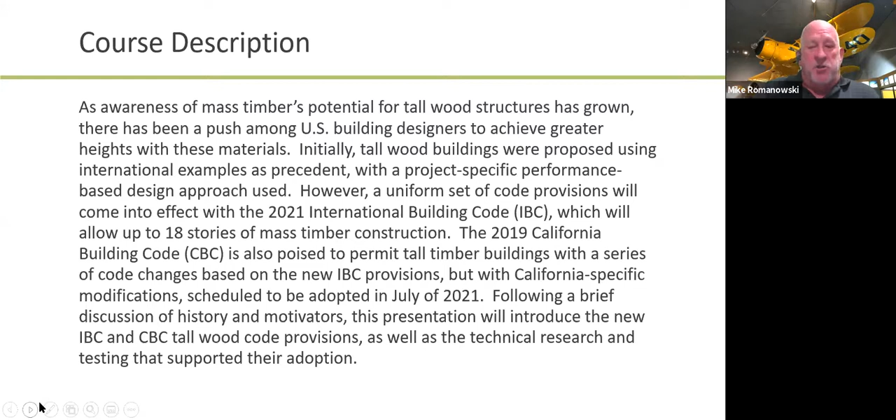Here are our learning objectives. We'll talk about some global history, what's going on in the world -- most of it has been overseas in terms of tall wood, with very few tall wood examples in North America. We'll explore the work and conclusions of this ad hoc committee, going over the new recommendations that will go into the 2021 IBC. We'll talk about the new different types of mass timber construction, existing construction types as well, and finish by identifying the differences between the IBC and CBC versions as far as tall wood goes.

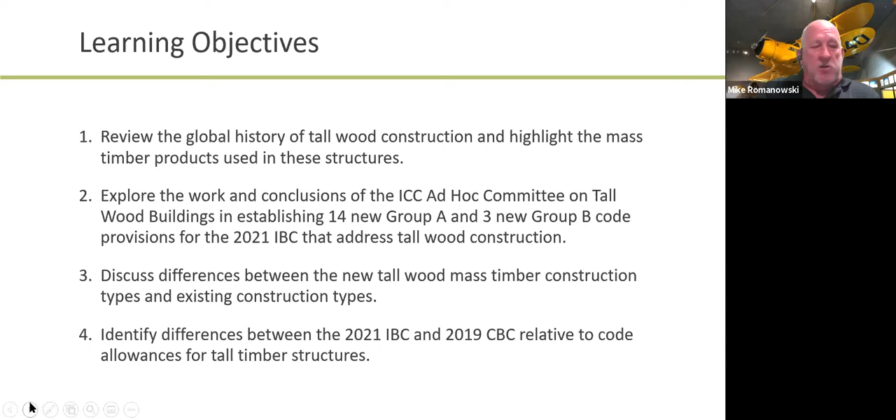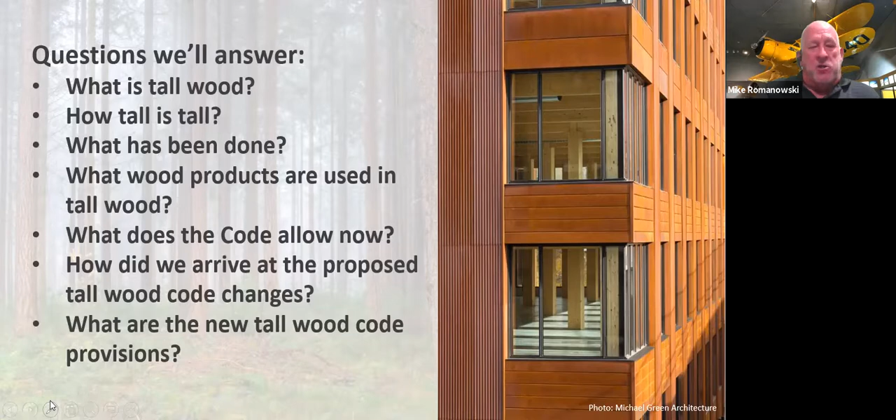So some of the questions we'll answer: what is tall wood? How tall is tall? What's been done so far? What products are used? What does the code allow right now? How did we arrive at these changes? And what are these new provisions?

Before we get too far, I want to go over some terminology. Everybody's pretty familiar with the term heavy timber. We've got a type of construction in the code right now, just called Type 4, also called heavy timber. You'll see that term used quite a bit, and it's been around for over 100 years.

It's based on the fact that large wood members char at a very predictable rate, and that char layer creates an insulating layer for the remaining core of sound wood. It was found early on that if you built a heavy timber building with large members, it didn't all go up in flames at once. It was very hard to get fire to start burning in heavy timber members. Even with a fuel load burning against it, it would char at a predictable rate and stay in place. With large enough members, you could exit the building safely, and firefighters could enter and fight the fire safely.

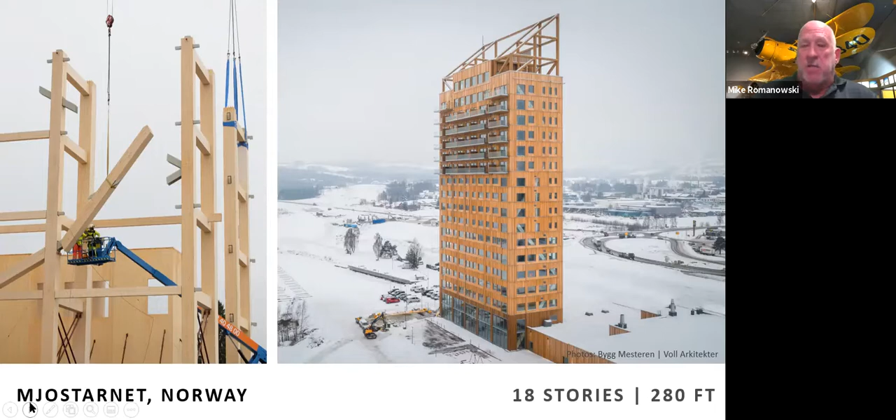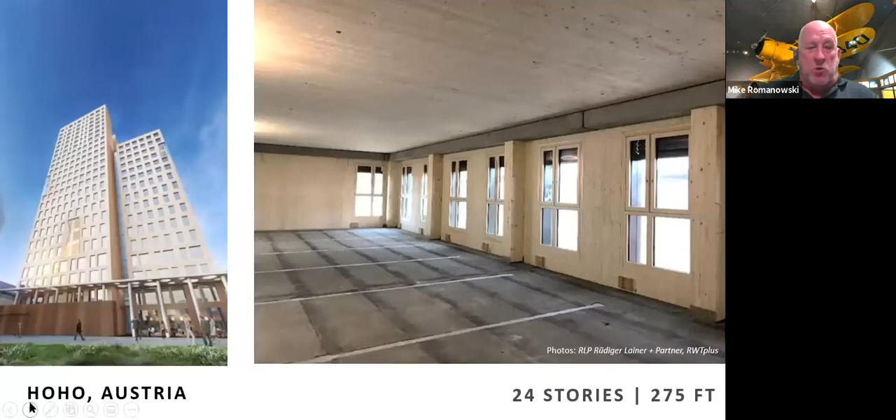There's another project called HoHo in Austria, which is 24 stories - that's 6 more than Mjøstårnet, but it's only 275 feet, so they had a closer floor to floor height. It's technically not the tallest in terms of feet, but the tallest in terms of number of stories. Again, both of these are not in the United States - these are Austria and Norway.

The closest one we have to us right now is the Brock Commons project, up in British Columbia at the University of British Columbia. Again, this is 18 stories, 174 feet - actually 17 stories of mass timber on a 1-story concrete podium. Maybe a few of you have even seen this. I got to visit the site the last day that they were flying the last wall panel into place. But what's interesting here is that speed of construction was the big driver on this.

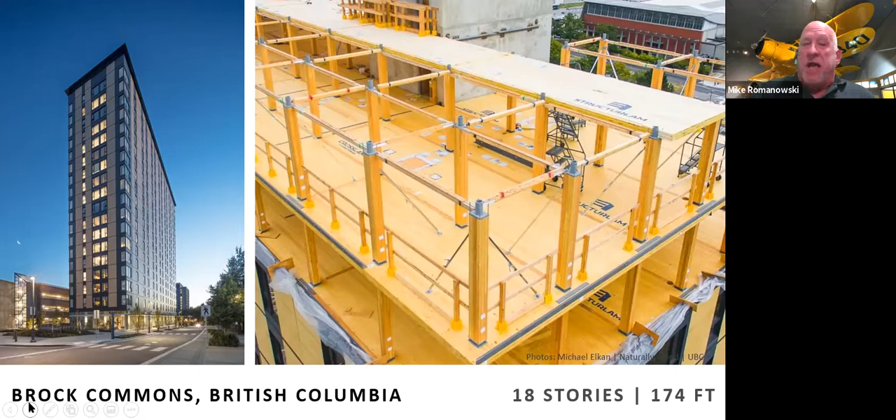It went up real fast, but the end product - there is not 1 inch of exposed CLT. Everything is totally encapsulated. And what you'll see, and we'll talk about this later, this pretty much mimics the new type of what's called 4A construction, which is fully protected mass timber.

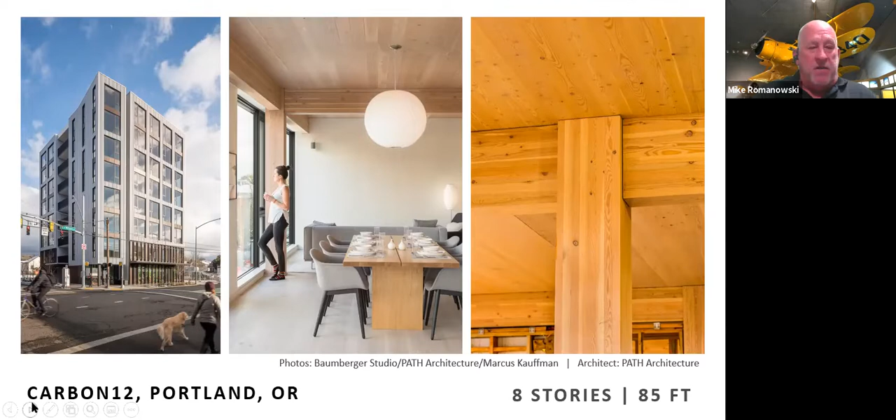Now, in terms of what we have as an example of a tallwood building in the United States, I can count them on one hand, and I can actually count it on one finger. It's the Carbon 12 project. This is the only example of what we would call a tallwood mass timber building in the United States. It is completed, it's 8 stories, only 85 feet, which is allowed by current code, but you can't have 8 stories of wood under current code. This is 8 stories of mass timber, so it's outside current code, but it is very similar to one of the new construction types, and we'll talk about that. But that's what we have for an existing example.

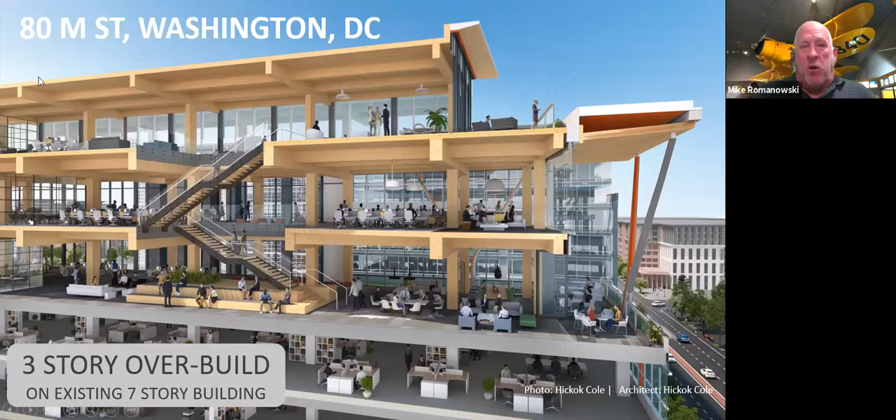One other interesting one is a 3-story overbuild project in Washington, D.C. What this is - an existing 7-story concrete building, I believe only designed for 1 additional story for future expansion. But what they realized is the weight of mass timber is so significantly lower than a concrete building, they were able to add 3 full stories of mass timber instead of the 1-story original in concrete. So this is another option, not real popular yet, but it's called overbuild. This is going on in Washington, D.C. right now.

In terms of materials, we touched on this briefly last presentation. Glulam is one you're probably familiar with, and cross-laminated timber, CLT, is the most popular of the mass timber materials. Quite a few people come to me with questions about mass timber, but what they really mean is CLT. You do need to remember there are other types of mass timber.

One of those, shown in the upper right corner, is nail laminated timber. These are your 2x joists, stood on edge with no space between them, nailed through so they're all joined together. This is covered under the current code, and has been in past codes, called mechanically laminated decking. It's in the code, just not called nail laminated timber, but that is a type of mass timber.

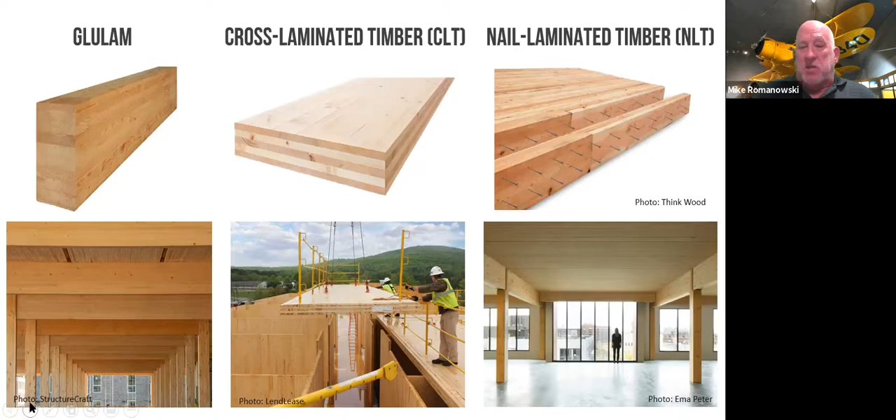It's what they used in the T3 building, which you see pictured in the lower right corner. Similar to nail laminated timber is DLT, dowel laminated timber, where you're using hardwood splined wood dowels to join the pieces together. The big difference is nail laminated timber is basically construction lumber with eased edges and various imperfections, while dowel laminated timber is milled before it goes together, so it has extremely tight tolerances, all exactly the same width and depth, a much more polished looking material.

Because it's milled ahead of time, they can come up with some very interesting reveals that are really good for acoustics. So it has an appeal from that respect. Again, this is dowel laminated timber.

Another type related to cross laminated timber is MPP, mass plywood panels. It's approved under the CLT standard, but instead of using solid sawn lumber, it essentially uses LVL lumber, made from veneers, which is why it looks like a big piece of plywood. This is the new kid on the block in mass timber. If you hear about MPP, that's what it looks like. The face of it looks different from CLT, because CLT shows lines about every 6 inches if it was 2x6 lamina, whereas MPP has whole 4 foot wide panels, so it looks like a piece of plywood on the underside.

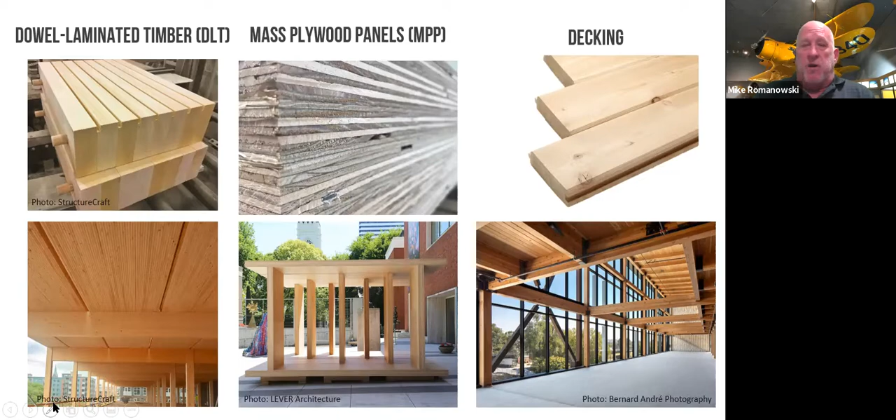Then there's T&G decking, which you're very familiar with. This is considered a type of mass timber element, used as the floor elements in a number of mass timber buildings. It can be 2x, 3x, 4x, a variety of thicknesses.

So the question is, why tall wood? Global population is one of the big drivers. 7.6 billion is our population right now, but it's projected to be 9.8 billion, a 30% increase by 2050. This rock we're living on isn't getting any bigger, but more people need more food, so we need room to grow the food too. While they may someday figure out how to grow food in a high rise, for right now, high rises are where we have to live. So we have to grow upward instead of outward to accommodate this global population boom.

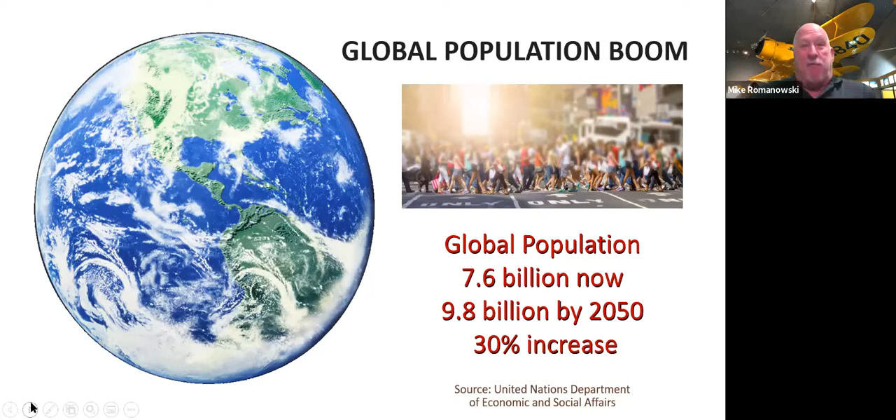We're going to look like the Jetsons. You remember what that looked like? Everything is a tall building, and we fly around between them in our little cars.

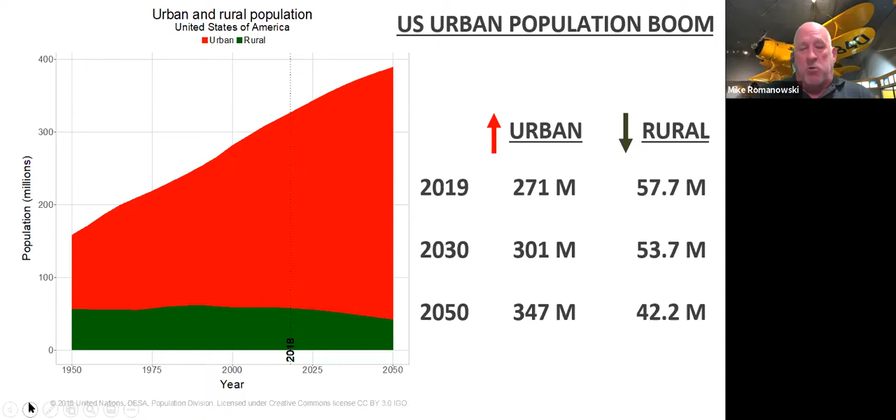Here's a good graphic that illustrates this. You can see what the green, or rural population, has been doing since the 50s - it's actually been declining, and it's projected by 2050 it'll be down to 42.2 million. The urban population, in red, look at how it's climbing and how it has outgrown the rural population. This is what we need to accommodate. So again, going upward versus outward is our choice, and mass timber's sweet spot is going to be in that 6 to 18 story range, which is exactly what these new construction types under the new tall code provisions will provide.

One of the reasons mass timber is a good alternative given today's environmental issues like greenhouse gases and carbon sequestration is that wood sequesters carbon. All the carbon that the tree cleans while growing, it expels the oxygen, which we like, but it holds on to the carbon.

50% of the molecules in a piece of construction lumber are carbon. That's the equivalent amount of carbon dioxide that did not get released into the atmosphere. It's also a very environmentally friendly building material in terms of greenhouse gas emissions. Compared to other popular building materials, it's a fraction of the greenhouse gases.

As an example, the Brock Commons project used about 2,200 cubic meters of CLT and glulam, which takes 6 minutes for US and Canadian forests to grow. But the carbon stored in the wood was over 1,700 metric tons, and the avoided greenhouse gases were almost 700 metric tons. That's about 2,400 metric tons of CO2 that did not get into the atmosphere.

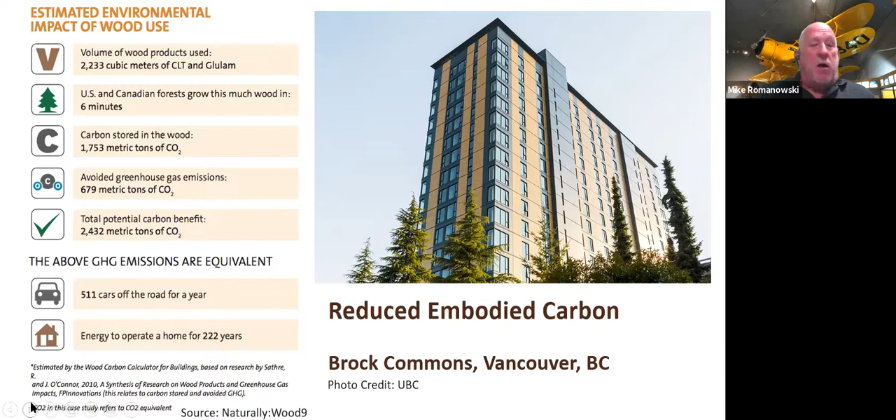That's 511 cars off the road for a year, or the energy to operate a regular home for 222 years. So again, real economic and environmental advantages to mass timber. That's one of the drivers.

So what are the market drivers for mass timber? Well, one of the biggest is construction efficiency and speed, particularly compared to a cast-in-place concrete building. On the Brock Commons project, they erected one entire floor of CLT in one day, put up all the glulam columns the next day, and erected all the exterior offsite fabricated wall panels the third day, then it all started over.

That probably wasn't the exact order they did it in, but it's way faster. The Brock Commons project, with 17 stories of mass timber, erected all 17 floors in 8.5 weeks with a crew of 8. That was 3 days per floor, working 6-day work weeks with a crew of 8. It was amazingly fast, and that's one of the drivers for mass timber.

All these parts are offsite fabricated, so construction site constraints are reduced, particularly in an urban infill area where you don't have a lot of room around the project or room for what you call a laydown yard to store materials. On a mass timber project, you're not storing materials.

You don't store the CLT or mass timber elements on site. They arrive on site on a truck, you pick them off the truck and fly them into place right then. So speed is big, but also the site constraint issue is big.

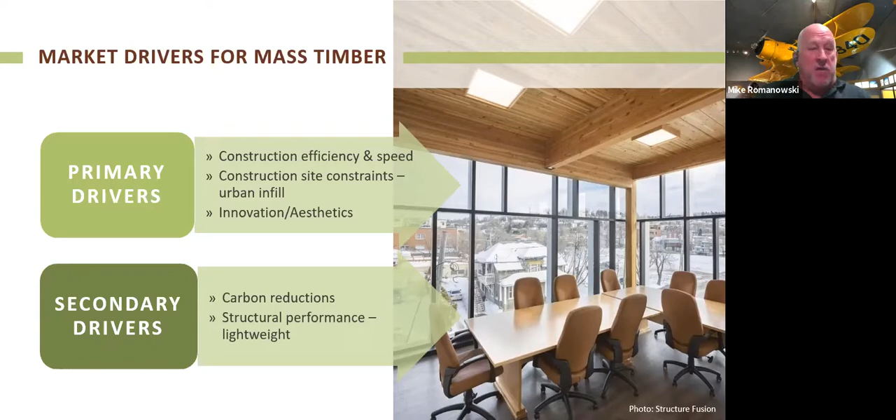Also in California, where seismic is a big concern, seismic demand is directly related to mass. So if you have a lower mass structure, it has a lower seismic demand, meaning cost savings there as well. So a number of things like that drive the market.

Let's talk about US building code status right now. Currently, this is still the current IBC and current CBC -- even though the new revisions to the 2019 CBC have been published, they won't be adopted until July. So current building code status right now says for wood construction -- type 3, type 4, type 5 -- 6 stories with a B occupancy, or 85 feet.

That's the absolute upper limit. If we're talking R occupancy, residential occupancy, that's only 5 stories and 85 feet. That's in type 3 construction.

If you want to go over 6 stories, then really your only choice has been this alternate materials and methods request, or AMMR, as we call it, through a performance-based design. And again, this is allowed by code. It's 104.11 in the code, but there's always more hoops to jump through to do this.

That's what designers have done so far to do tall wood in the United States and Canada. And interestingly, all this stuff—Mike, how many buildings have pursued the alternate route in California? Zero. The only one is the one in Portland.

Carbon 12, in Portland, exactly. Are you aware of any that are attempting to pursue it? Oh, absolutely. Absolutely. I mean, we have one, I can't give you the name of it. It's right in LA. It's been planned for 2 years now.

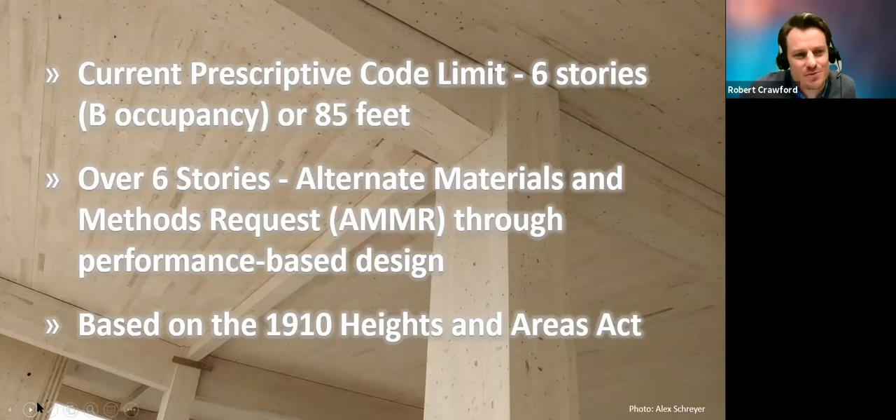I'll be honest, until I joined Woodworks, I had never done a project under this. I didn't even know this existed, that it was a path to go.

Yes, it's more hoops to jump through, but that's how you did it. Mass timber only came into popularity after it first appeared in Europe in the early '90s. It was kind of a college study type thing, then they started thinking this is interesting, we should do buildings out of this. So they started getting on board, getting their codes changed, but it just didn't catch up in the US. We're about 10 to 15 years behind, but we are catching up.

Within a few years, we will not only have these height and area provisions adopted, but we'll have some additional structural openings for using CLT as shear walls. Right now, that's not approved, but it will be coming in future code. So in the future, you'll see tall buildings that may be all CLT - walls, floors, you name it. Right now, you can't really do the walls because it's not approved as a shear wall, even though these code provisions allow it from a height and area standpoint for fire safety. You're going to have to use a different lateral force resisting system - concrete shear walls, moment frames, that type of thing.

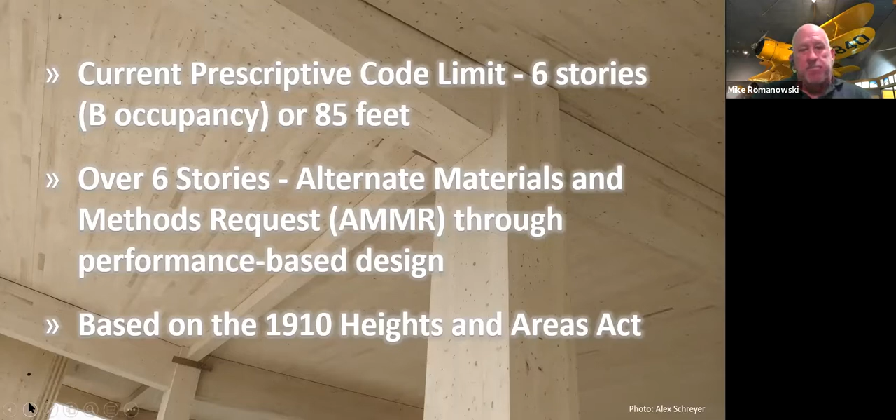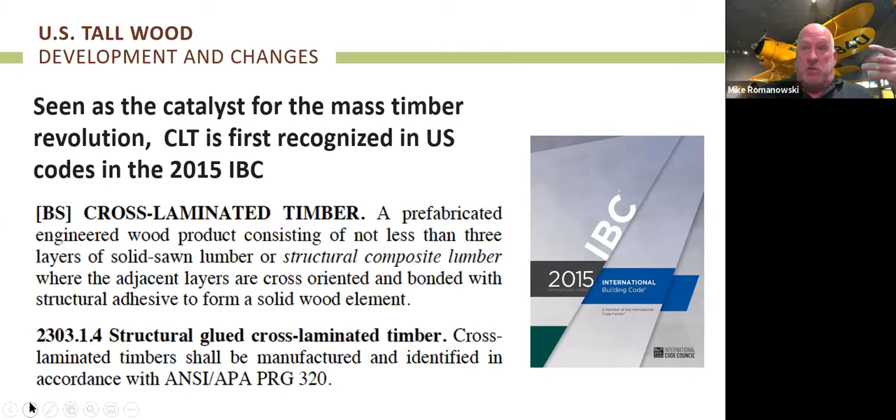Within the code, 2015 IBC is where this first appeared. CLT was really the catalyst for this. It's defined here, and then they refer to APA PRG 320 - that's the standard, just like the product standard for plywood or glulam. So any manufacturer wanting to use their product under the IBC in the United States has to meet this PRG 320 approval. Some European manufacturers - at least 3 - are selling product in the US that meet this, but not every European manufacturer necessarily does. All the US manufacturers do, because they know that's how they sell their product in the US.

So let's talk about the ICC ad hoc committee, formed in December of 2015. This is when ICC said, we've got to get moving on this. They had 3 objectives: explore building science of tall wood buildings, investigate feasibility of tall wood, and take action on developing code changes.

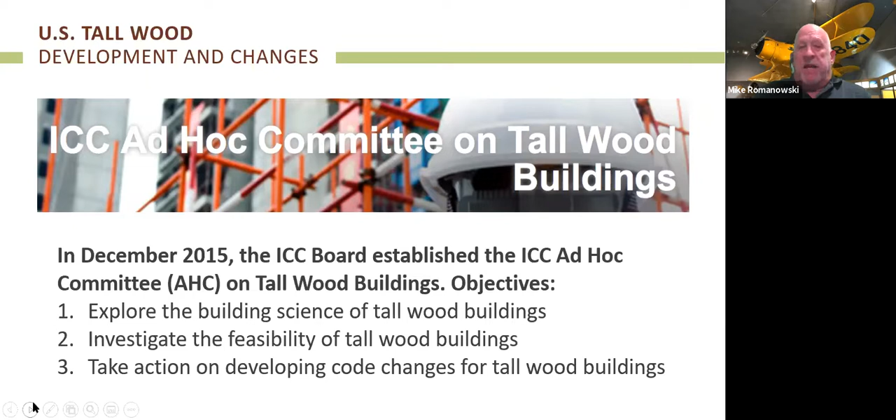They had 6 objectives, and the first 2 are the most important. Number 1, the absolute most important: no collapse under reasonable scenarios of complete burnout of fuel, without automatic sprinkler protection being considered. So obviously the structure cannot be part of the fire. If it's made of wood, that's fine, but it cannot contribute to the fire. Assuming you had no sprinklers or they didn't work at all, if you had this fully loaded unit or units with furniture, whatever - that's the fuel load - if that caught fire, it has to self-extinguish.

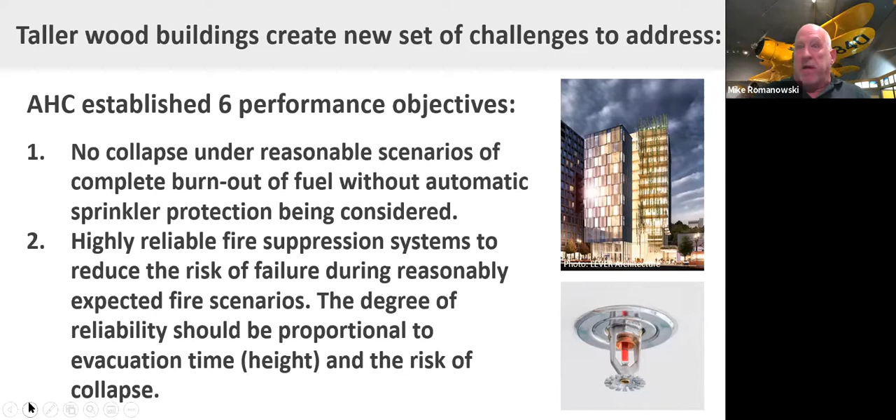That's the testing and research they were looking into. Objective 2 was, notwithstanding objective 1, we're going to make you put in a highly reliable fire suppression system to reduce the risk of failure during reasonably expected fire scenarios. The degree of reliability was directly proportional to the evacuation time or height. You don't use the elevators, you have to come down the stairs, and firefighters have to go up the stairs. So the taller the building, the more protection you have to have - same rationale as for type 1A construction.

Objectives 3 and 4 basically say that for the outside skin, you can't have any unusual high radiation exposure to adjoining properties under a reasonable fire scenario. So if your building is on fire, it can't just jump through the wall and catch the building next door on fire. And objective 4 is, if the next door neighbor's building is on fire, it can't jump through the wall easily and catch your building on fire.

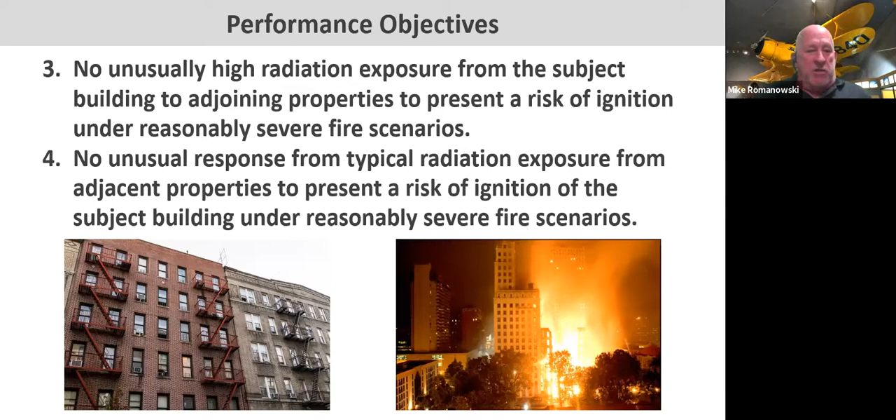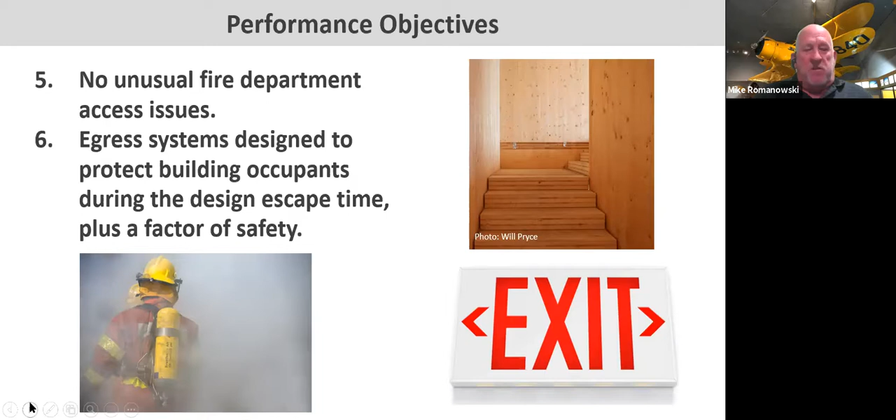The last 2 objectives, probably the most minor but equally important: no unusual fire department access issues, and egress systems designed to protect building occupants during the design escape time, plus a factor of safety. So those were their 6 objectives, and they came up with a test regimen.

They commissioned a series of 5 full-scale tests on a 2-story mass timber structure at an ATF facility in 2017. It was a little 2-story, all CLT building, with some glulam columns and glulam beams.

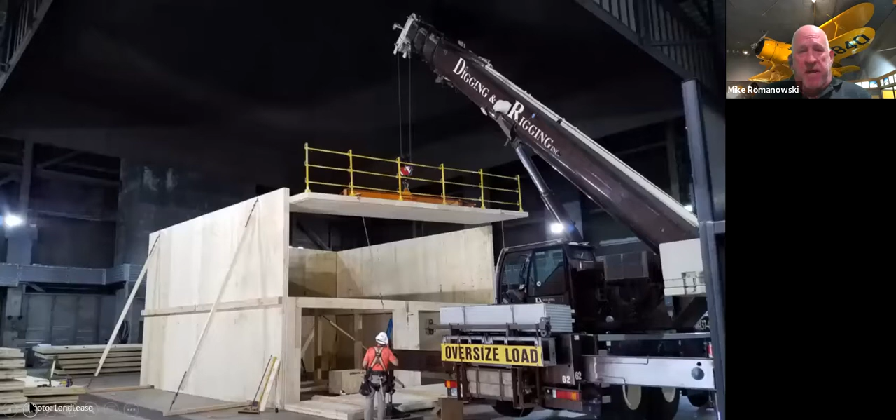This is what it looked like—in a big warehouse building, a big tilt-up or maybe cast-in-place building, a big test facility. You can get the scale, the size, from the man here.

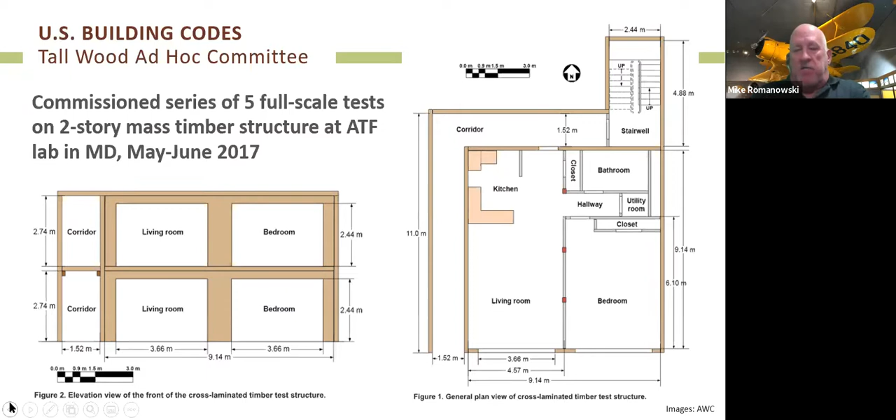The test setup had a corridor around it and a stair shaft in the back, then a living room and bedroom, same layout for the upstairs and downstairs. This picture shows before they built the corridor around it—can't tell if they built the stair shaft yet, but this is what it looked like under construction, with all the CLT pieces.

Here's what the 5 tests were going to look like. The first is where all mass timber surfaces are protected with 2 layers of 5/8 gyp, no sprinklers. This kind of mimics what will be the new Type 4A—basically no exposed mass timber, but no sprinklers either. Test 2 was similar to what we're going to call 4B.

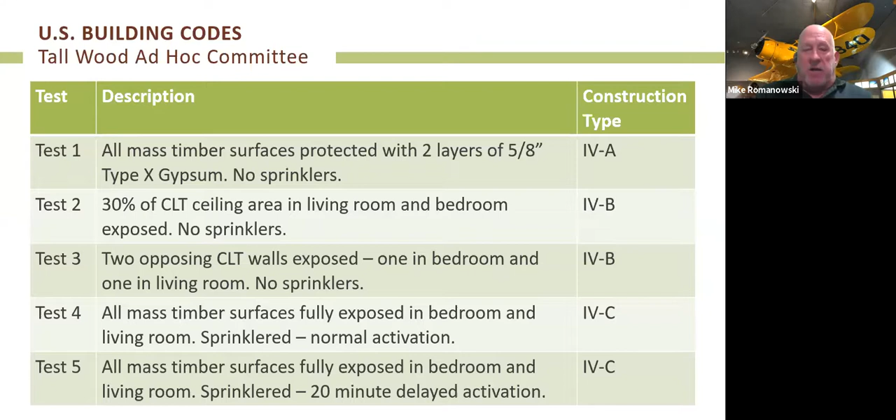That's the one where you can expose some of the mass timber. In the test case, they exposed 30% of the ceiling area in the living room and bedroom, again no sprinklers. Test 3, instead of exposing the ceilings, they exposed the walls, but again no sprinklers. Test 4 was all mass timber surfaces fully exposed, but this is the baseline where you do have sprinklers with normal activation. Test 5 was similar to 4, fully exposed, except we delay sprinkler activation by 20 minutes and see what happens.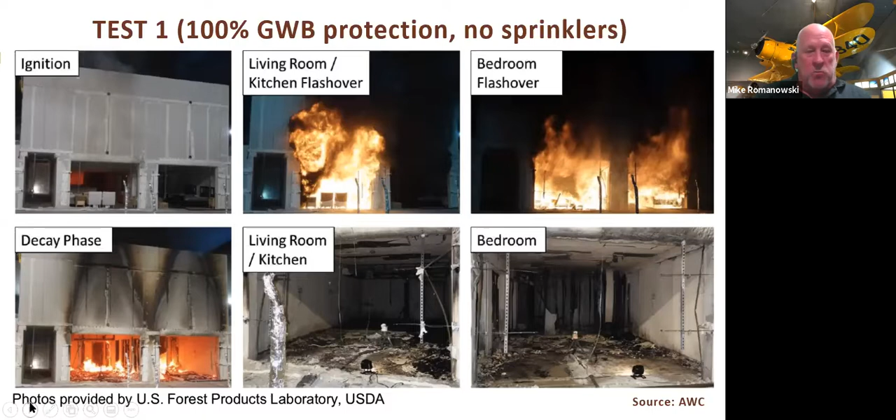It did char. It protected the remaining CLT, which was sound material above that, and the fire still self-extinguished. The mass timber itself did not contribute to the fire—it was charred due to the fuel load, but that's all.

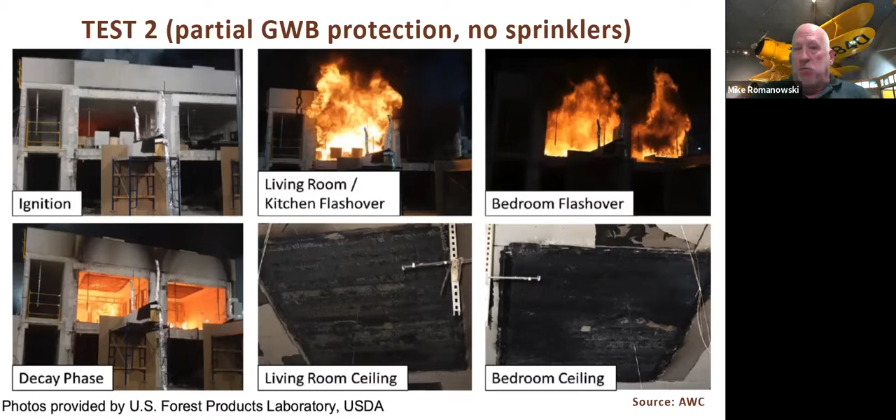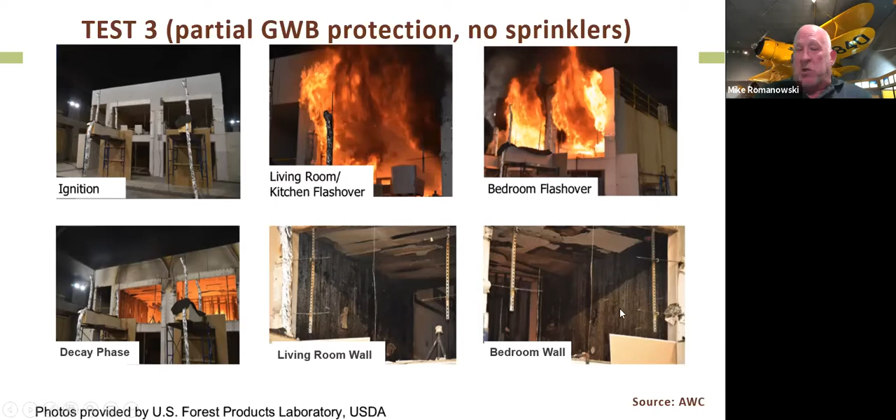Test 3, very similar—now we're talking walls. The photo in the lower left corner shows the exposed wall. Again, flashover in the upper right, and you can see what they look like in the lower right. Some of the drywall did look a little more distressed on the ceiling—I don't know the reason for that—but the structure never caught fire and it still self-extinguished.

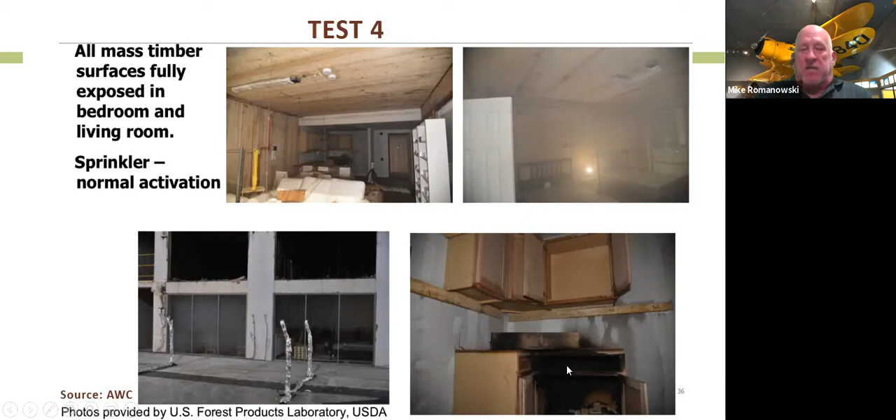Test 4 now is like the baseline one, where we have sprinklers. They always lit the fire with the point of ignition back in the kitchen—the fireman went back there with a propane or gas torch to light it. Within a few minutes, the sprinklers activated and nothing happened. So this is what we'd expect with normal sprinklers. And this is the delayed activation test, where they waited 20 minutes.

It never got to full flashover, but it started to burn, and then the sprinklers, after 20 minutes deployed, extinguished it, and none of the mass timber contributed to the fire in any of these cases.

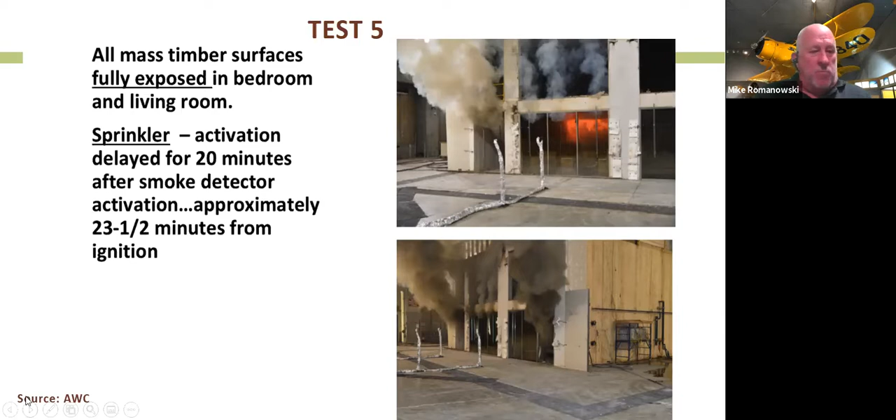While this was going on, there was also some testing unrelated to the ad hoc committee, testing some of the CLT. One thing they found was an issue with the early types of adhesives in CLT: when testing a horizontal surface in a fire, charring would occur, but when the fire depth reached the adhesive layer, the adhesive gave way. It was heat sensitive, and you'd drop that char layer and expose clean wood.

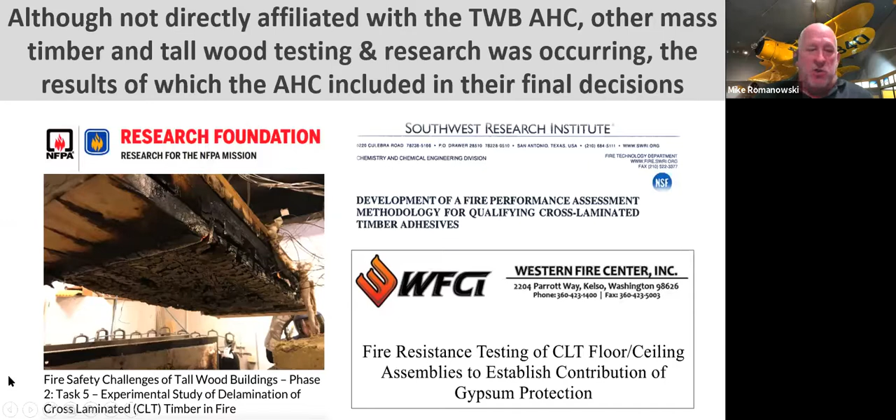So the ad hoc committee in the code recommendations said you need to comply with the new product standard, which requires the new type of adhesive that is not heat sensitive. Even though they didn't test for this specifically, they incorporated the findings from that testing into the code. They did it by requiring compliance with PRG 320-18, the 2018 version, where they changed the adhesive requirements.

So here's what the new provisions, the proposals, look like. The 3 main ones we'll be concentrating on are in the upper right corner: new table 504.3, 504.4, 506.2 for allowable heights and areas. Other things in there are not so important, but obviously they were all incorporated.

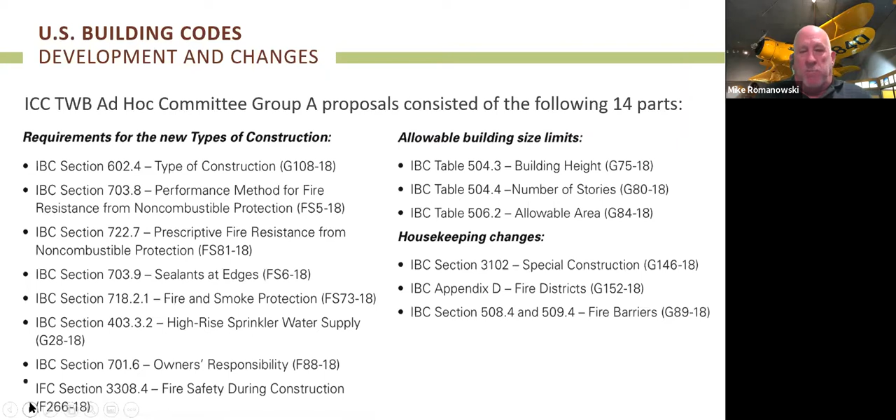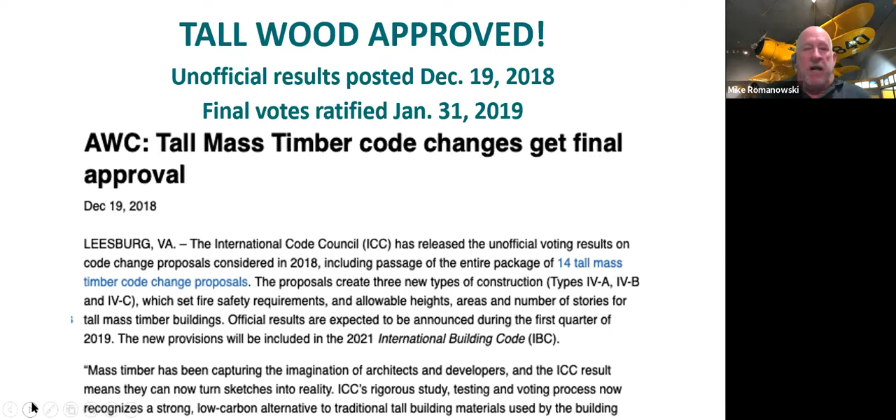After all this testing, they proposed the changes, which were all voted on - public voted on it - and it all passed. Final votes were ratified January 31st of 2019. At that point, it was a given that the 2021 International Building Code would have these tall wood code provisions in it.

Subsequent to those 14 proposals, called the Group A proposals, there's another 3 small things in Group B proposals. These were also subsequently approved. These mainly had to do with inspection and protection of connections and such.

So what has changed? Well, as everybody knows, there's basically 5 main types of construction. All of them have an A and a B, which means A is fully protected, B is not protected, except for type 4. There's no real fire ratings per se in type 4 - you just meet minimum prescriptive sizes, and it's deemed to provide adequate fire protection.

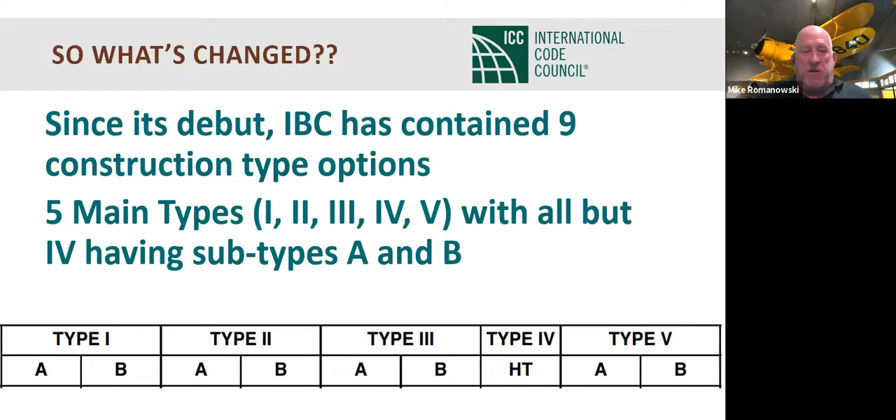In those categories, at Woodworks I'm mainly used to working in types 3, 4, and 5. Types 3 and 5 are really light frame, stick framing. Type 4 is the old heavy timber, or this is where mass timber also fits in, although mass timber can absolutely be used in types 3 and 5 as it is approved for that.

But now you do have to do calculations, or provide fire ratings, whereas if you met minimum prescriptive sizes for mass timber classified as a type 4 building, you didn't have to do any of that - you didn't have to have fire ratings, you just met the minimum prescriptive sizes.

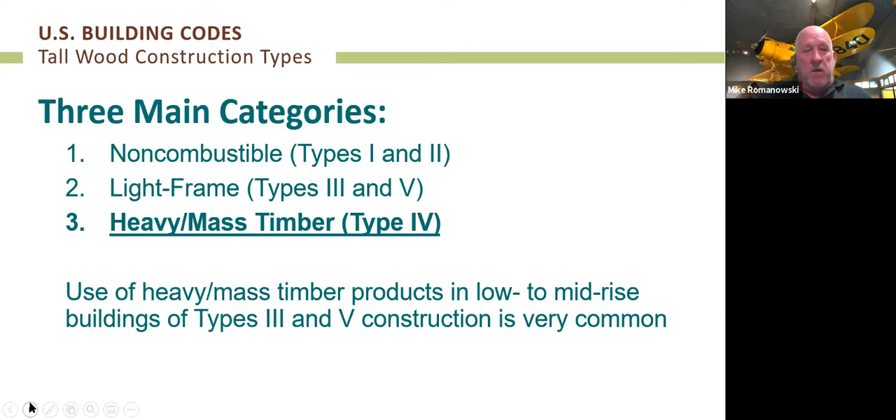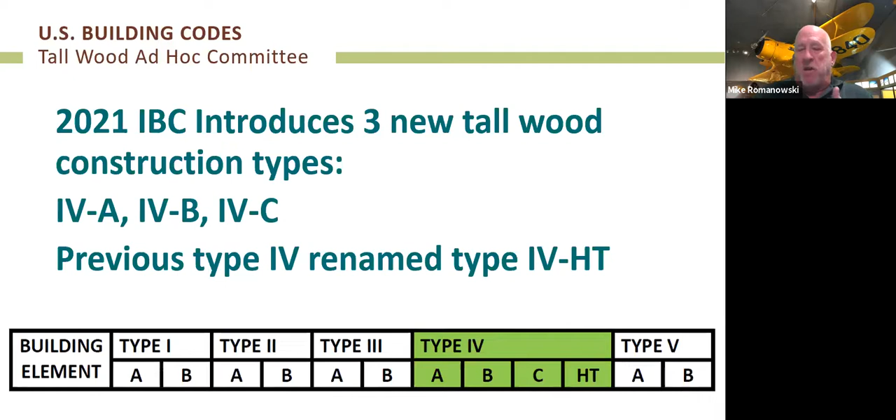So here's what the new code's going to look like. We're going to have these new type 4 construction types: A, B, and C. A, like in the past, is fully protected. B is now partially protected, and C is like not protected, like the other B category was in the other construction types. They are also renaming the old type 4 HT, just so it has its own subscript to make sure it's clearly different from the other A, B, and C. So there's now a 4A, 4B, 4C, and a 4HT.

The new building types will have some allowable heights and areas. As an example, not everything in the new code, but using B occupancy as an example: for type 4A construction, you'll be allowed 18 stories, a building height of 270 feet, and an allowable total building area - not the per floor area, but the total area - of 972,000 square feet, so almost 1 million square feet.

Now, if you broke this up over 18 stories, that would be 54,000 square feet per floor. You're allowed much higher per floor. Basically, you get to take 3 times whatever the per floor area is as the maximum building area for B occupancy under the IBC. That's where the 972,000 square foot number came from.

So that's 4A construction. 4B construction, again, this is the partially exposed. Now we're going to be capped for a B occupancy at 12 stories, 180 foot building height.

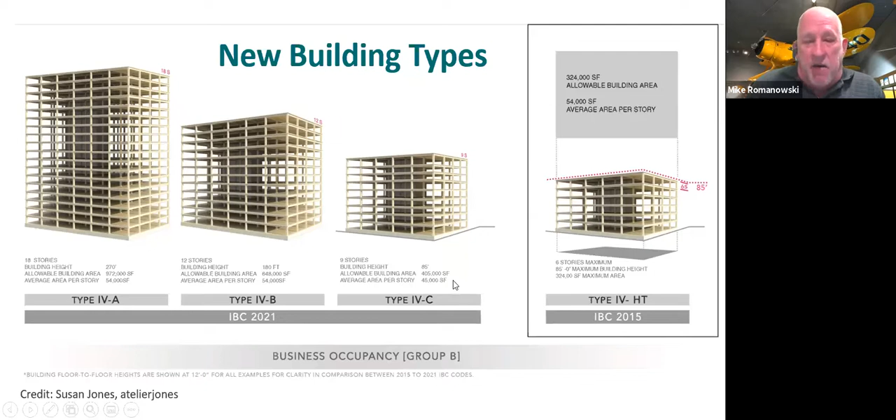Total building area will end up being over 500,000, 648,000 square foot. Actually the same allowable area per floor, because we're back to 12 stories max now, but averaging 54,000 per floor. And then 4C, which is essentially fully exposed mass timber, for B occupancy will be at a 9-story limit, building height of 85 feet, 405,000 square foot total building area.

What does 4A look like? Well, Brock Commons looks a lot like what 4A would be. It's essentially 18 stories above the ground, 17 above the podium. The overall building height wouldn't exceed 270 feet, I don't believe it does. And whatever the allowable area is, I don't know what Brock Commons is offhand, but it would have met those two requirements. So that's what it looks like.

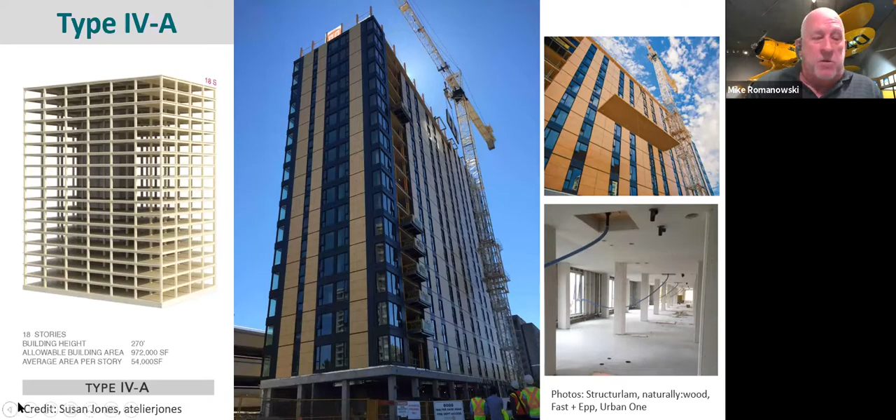Again, it's fully protected, so you're not going to see any of the CLT. When you go in the building, all the glulams are wrapped, the underside of the CLT is wrapped. Everything is fully protected. For 4A, then, how much protection versus how much exposed? Again, fully protected, zero exposure.

This is the typical detail around a column where they have a glulam column that comes up, with a little steel plug column in between. The CLT comes in, notched at the corners, bears on those bearing plates. The walls that go between the glulam columns are made of light frame steel construction.

One of the things I want to remind you, and I'll say it again: the type 4 types of construction, 4A, 4B, and 4C in the new code, while they allow you to go above what we could do with light frame wood, there is absolutely no light frame wood allowed in 4A, 4B, and 4C. Not even non-structural, non-bearing walls. That's too much of a fire risk. So there are people who thought, let's get away from 3A and do 8 stories of multifamily in mass timber. Well, that's fine, but you're not using light frame wood stud walls. You're doing something else. So no light frame allowed.

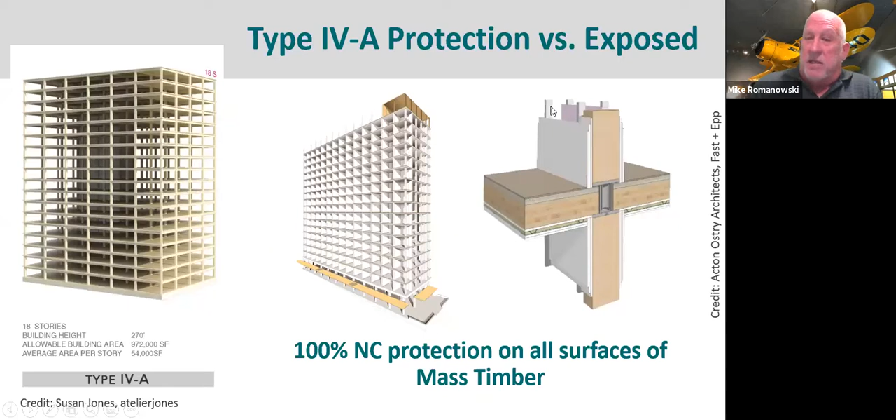This is an example. Between the columns, we had light gauge steel with 3 layers of drywall protecting everything.

Here's what the new code then says for different occupancies. Let's use B as an example, I mentioned this before: 18 stories, 270 feet. The area per story can be 324,000. IBC says for your total building area, you get to multiply that by 3. We're at 972,000. So we have some different occupancies here, A2, M, and R2.

These are all the IBC numbers, but the reason I highlighted A2 and R2 in red is I just want to alert you, this is what's different in the CBC. And we're going to talk about that at the very end. So again, what I'm giving you here are the IBC numbers. These numbers are affected by CBC. We'll talk about that later.

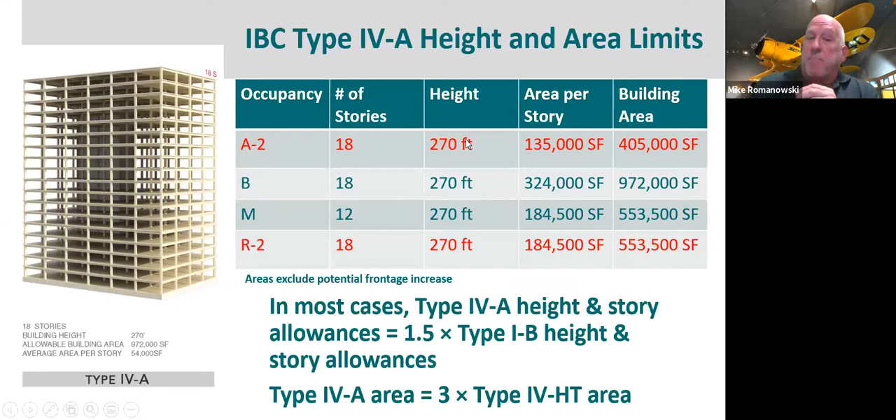Okay, so what does 4B look like? Well, there was a project called Framework. It was an award winner in the USDA mass timber competition a couple of years ago. They got permitted, got all ready to break ground, and realized the budget forgot to account for the demolition of the existing building. So they're still trying to work that out. We have our fingers crossed that they will, and we will get to see this. This is up in Portland, but again, this is a 12-story building. This would essentially fit into that 4B category.

Was never constructed. The one real interesting thing about this from a structural standpoint, and this is what they roughly spent most of their $1.5 million prize money on, was this CLT rocking wall shear wall system. It had center CLT shear walls with a post-tension rod at the center, which brings these walls back to plumb at the end of the earthquake. So it's pretty innovative. They've used this in another building up in Portland, even though it's outside code per se. They did it through the AMMR process. It wasn't a tall wood building, but they did use this rocking wall system there.

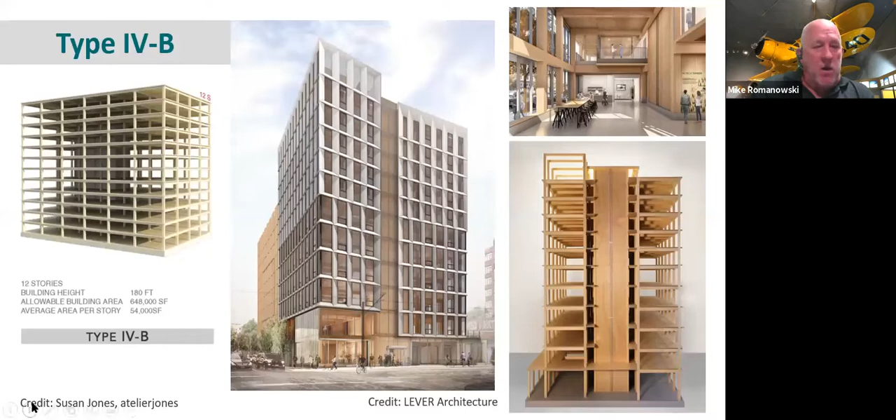But that's what 4B would look like potentially. Now in this one, again, 12 stories, 180 foot, 650,000 square foot allowable building area. The requirements now by code are 20% of the ceiling or 40% of the wall.

There are some formulas for how you can do a weighted average between the two. But again, this is a good example of what it might look like on the inside.

Columns like this don't count in the wall calculations, but when you have a beam above here, that does count as part of the ceiling area. So if all you were doing is exposing the ceiling, you'd look at your floor area. If that was 1,000 square feet, I'd say, well, I can do 200 square feet of exposed ceiling. It's not 200 feet of exposed CLT or whatever the mass timber floor element—you have to count the area on the sides of the beam and the bottom of the beam as well. So a little intricacy there, but again, 20% of ceiling, 40% of wall, or a combination of the two.

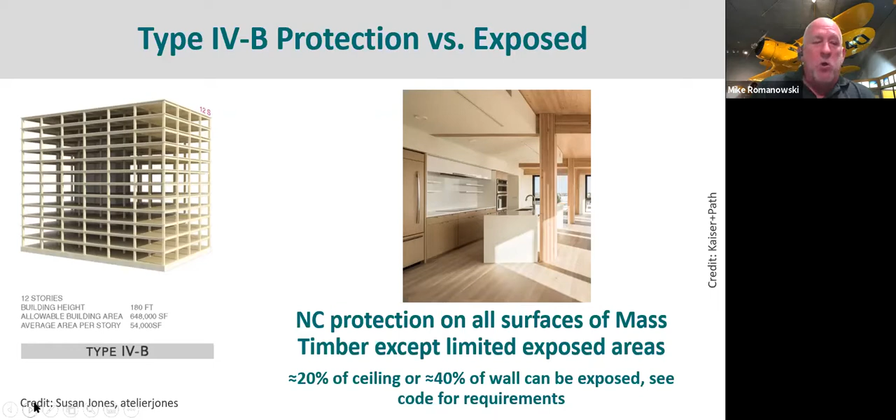Here's the allowable heights and areas. Again, same kind of thing—what's in red is what's affected by the CBC. You'll notice these are A and R occupancies, and I'll talk about that. There are special occupancies that CBC treats differently. These are two of them, but the B and M occupancies are no different from IBC.

Here's our allowable heights: 180 feet, 12 stories for some occupancies, mercantile only 8 stories. Here's our allowable areas. Okay, now let's move to 4C.

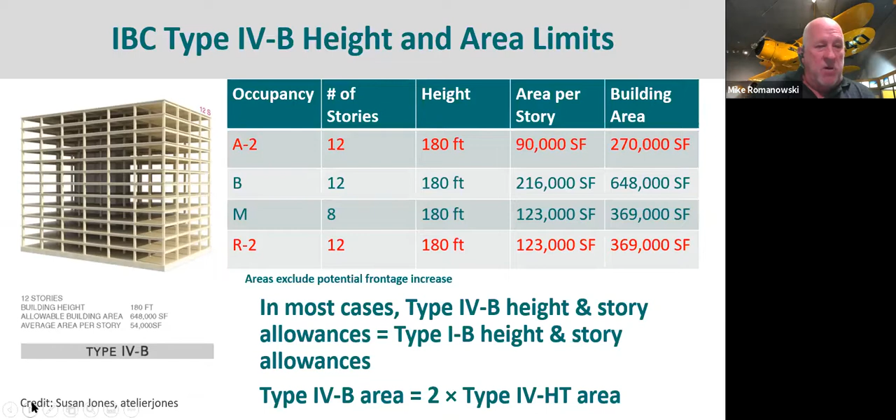What does 4C look like? It looks like the Carbon 12 project. It's the one built project that would be considered tall wood right now in the United States. It's a completed project up in Portland. Now you can see the glulam columns are exposed, the beams are exposed, all of the ceilings are exposed. They did not use CLT as their wall elements. For the lateral system, they used buckling restrained brace frames, and then non-combustible metal stud construction in their walls. So your exterior walls you see covered in drywall or whatever, but essentially all the mass timber is exposed here.

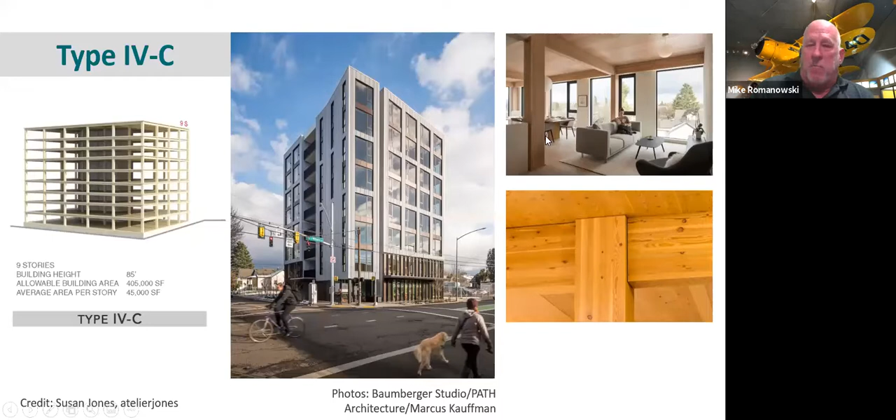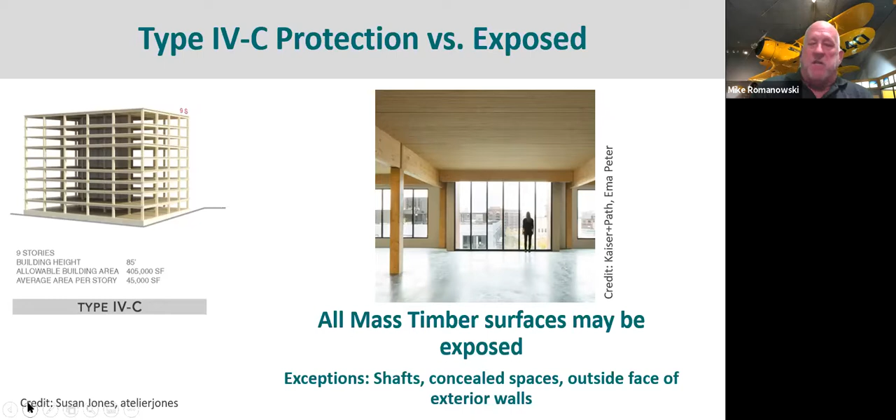Protection versus exposed—basically the code says you can expose everything with the exception of a few items, such as shafts, concealed spaces, and then there's a blanket requirement for the outside face of exterior walls having to have a layer of 5/8 inch type X, or 40 minutes of non-combustible protection essentially.

Here's our allowable heights and areas. You can see they're going down further. The interesting part is the height in feet is no different from what's in the code now for type 3 construction, still at 85 feet. The mysterious part to me is they said, oh yeah, B occupancy, you can go 9 stories, but you're capped at 85 feet. Beyond me how you do a 9-story building in 85 feet, but the code allows it.

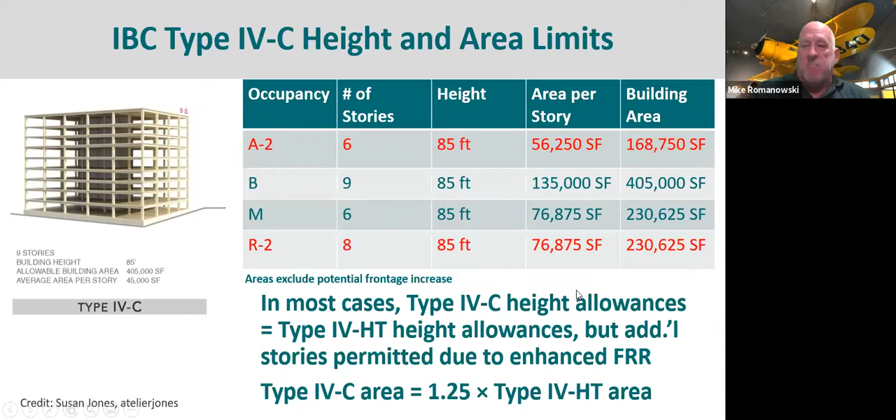Otherwise, looking at residential, we might be capped at 8 stories. Assembly, like a restaurant, 6 stories, but still we've got that 85-foot limit. The areas are commensurate with that—they keep going down. Again, the items in red are the ones that are different for California. We'll talk about that at the very end.

Let's talk a little bit about the fire resistance ratings themselves. This is similar to what you're familiar with from table 601, but now with the new construction types. So primary frame—these are the things that if they were to fail, you could potentially have a pancake failure. It supports other levels of framing, such as beams that support more than one level, or bearing walls that support multiple levels. So in 4A construction, it's required that you have a 3-hour rating at your primary frame, 2 hours if it's at the roof. In 4B, it goes back to 2 hour, 1 hour at the roof.

Same thing for 4C. Floor construction, we have those types of ratings like in table 601, except now it's a 2-hour requirement across the board for all types. Roof construction: 1.5 hours at the roof for 4A, 1 hour for 4B and 4C.

Something new here: the floor surface protection for 4A and 4B, which is the fully protected and partially protected, you're going to have a minimum 1-inch layer of non-combustible protection on the top. Now, fire is never assumed to occur on the top side. The reason they want this is when the fire is below, if there's any possible gaps in the joints between the CLT or your mass timber elements, you want to make sure that non-combustible protection prevents any fire or smoke from going up through those gaps.

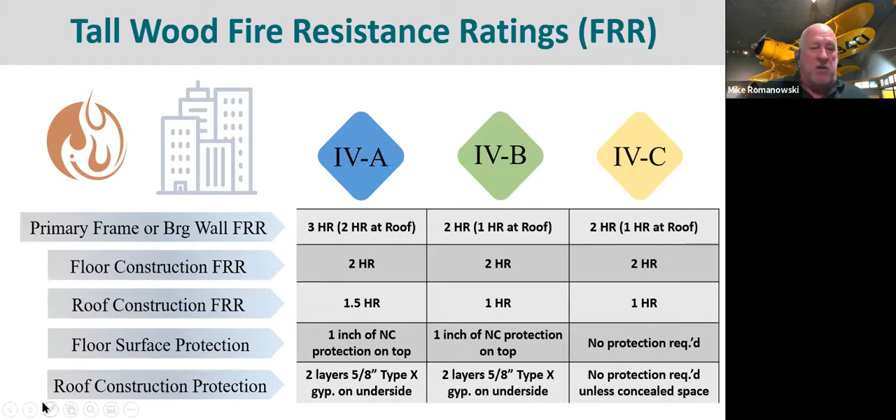So you'll almost always have a non-combustible protection like gypcrete or structural concrete on top. And then for roof construction protection, rather than requiring the non-combustible protection on top in 4A and 4B, they just say you have to have 2 layers of 5/8 type X gyp on the underside. But 4C says no protection unless you have a concealed space there.

Let's talk about the materials and protection then. Exterior walls, like I said, doesn't matter the construction type. All of them require 1 layer of 5/8 type X on the outside.

Just as an aside, CLT as a mass timber element, the most popular one, is absolutely not approved for direct weather exposure. So even if it were ultimately approved as a shear wall, you cannot expose the outside face of the CLT. So the fire requirements are going to require you to put a minimum 1 layer of 5/8 type X on it, but just using CLT, you can't expose it to weather. So you're going to protect it somehow.

Again, I'll point this out again: what structural materials are allowed? Two things, either mass timber or non-combustible. You do not see light frame wood in here. It is not allowed as a structural material in 4A, 4B, and 4C.

Now, what about concealed spaces? In the past, type 4 construction, you couldn't have it, but they're gonna allow it in the tall wood provisions for 4A, 4B, and 4C. It's permitted, but it does require certain non-combustible protection on the mass timber surfaces.

And then kind of a new thing here: we can do calculations to show, based on charring, a certain fire rating for wood. But what they're going to say is for gypsum protection, in other words non-combustible protection, for 4A, if you need something that has a 3-hour rating, you still have to put minimum 3 layers of 5/8 type X gyp. If it's a 2-hour rating or less, you have to put 2 layers of 5/8 type X gyp.

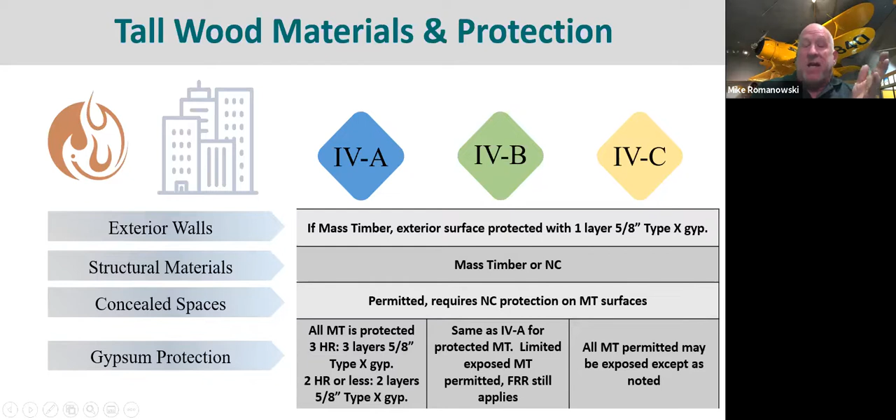4B construction says, hey, it's the same as for 4A, except in the places where you expose the mass timber where it is allowed to be exposed, you just have to get 100% of whatever the fire rating is through your char calculations. And then 4C construction says all mass timbers permitted may be exposed except as noted. And again, that was the shafts and concealed spaces, that type of stuff.

We have a real good resource then, if you'd like to read up on this, it's on our website. It's called Tall Wood Buildings in the 2021 IBC. It's basically what this presentation was based on, goes into much more detail. It's written by one of our technical directors at Woodworks, who's considered our mass timber expert. When you call me with a question on mass timber and it stumps me, I go to Scott Breneman. He's one of the real gurus in terms of mass timber at Woodworks. But this is available for a free download on our website if you'd like to check it out.

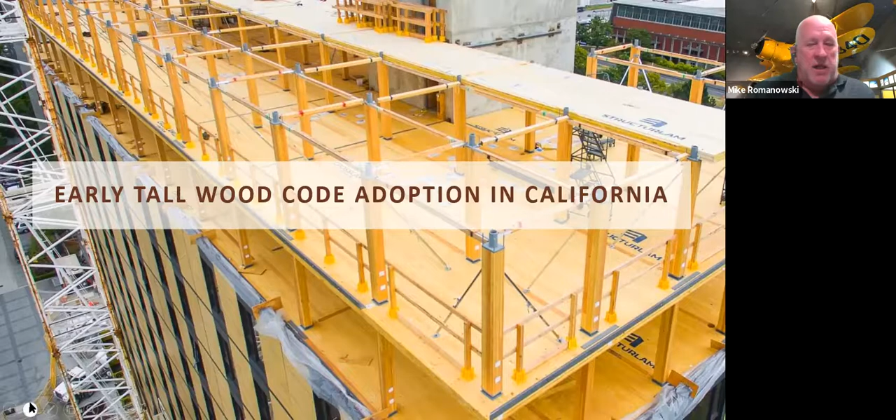So, early tall wood code adoption in California. Like I mentioned, back in August, they voted on this at the California Building Standards Commission. It was passed unanimously. Those changes were scheduled to be published in the new 18-month revision to the 2019 CBC on January 1st of 2021, which has already come and gone. I haven't been to the website to see if you can actually purchase it yet, but theoretically, it's supposed to have been published. And then it will become adopted and effective on July 1st of this year.

Here was Chief Mike Richwine from the State Fire Marshal.

He had 3 things to point out about why California wants to be early adopters of these tall wood provisions. One has to do with all this tall wood stuff—mass timber, cross-laminated timber, nail-laminated timber, even glue lams—all made from small pieces. So if we could get a CLT manufacturing plant here in California, which we don't have right now, this would really help our economy.

So they want to spur mass timber production in California. Keep your fingers crossed, we hope to get some actual manufacturers here. There's a number of them up in the Pacific Northwest, Portland, Spokane, across the border—one in Montana, one down in Dothan, Alabama, and 3 more up in Canada. So nothing within 1,000 miles of us here. Probably the closest is coming out of Portland.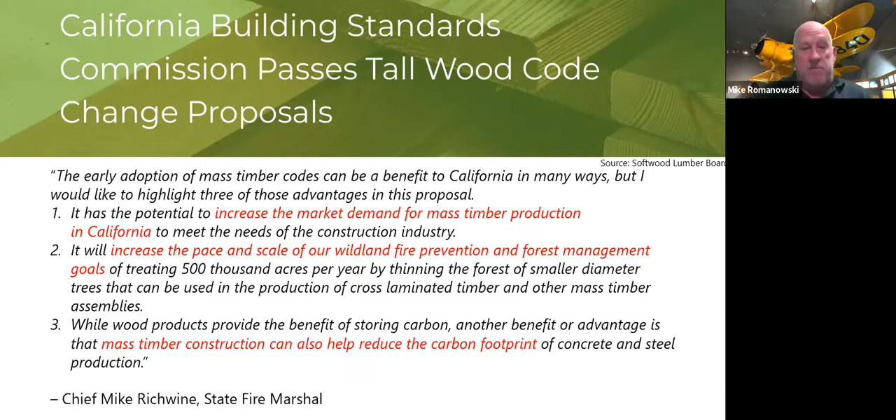Okay, I have two slides left. Here's the differences with CBC. What we've always done, and it's no different for tall wood, is we treat these six occupancies differently than IBC does: A, E, H, I, L, and R. I should say L doesn't even exist in the IBC—that's laboratories, a California-specific occupancy.

The first difference is the double dipping exception. Normally when you add sprinklers to a building, you can take both a height and an area increase. Height is usually 20 feet and 1 story. Area is 3 times the non-sprinkled base area. IBC says regardless of occupancy, if you put sprinklers in, you get to take both a height and an area increase. CBC says that's fine for some occupancies, but if it's A, E, H, I, L, or R, you can take either a height or an area increase—not both together.

Likewise, there's a difference between CBC and IBC for total building area. IBC says for all occupancy types, for a 3-story building or more, you can only multiply the floor area by 3. CBC says that's fine for some occupancies, but if it's A, E, H, I, L, or R, you can only multiply the allowable floor area by 2. So there's a double whammy: for these occupancies you can only multiply the floor area by 2, and you can't take both the height and area increase—you're limited to one or the other.